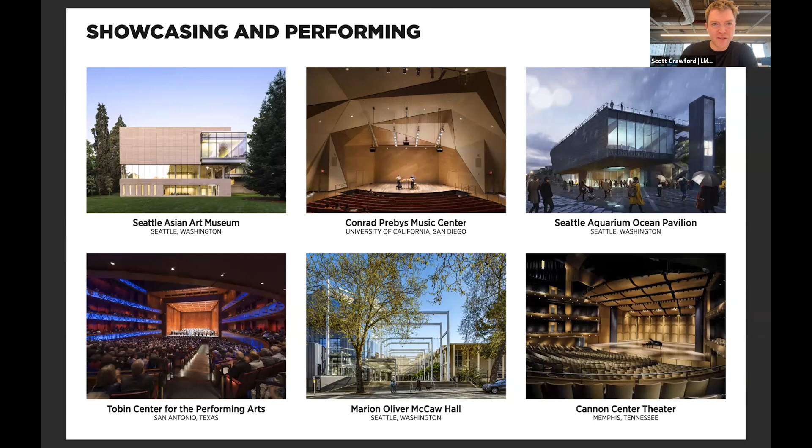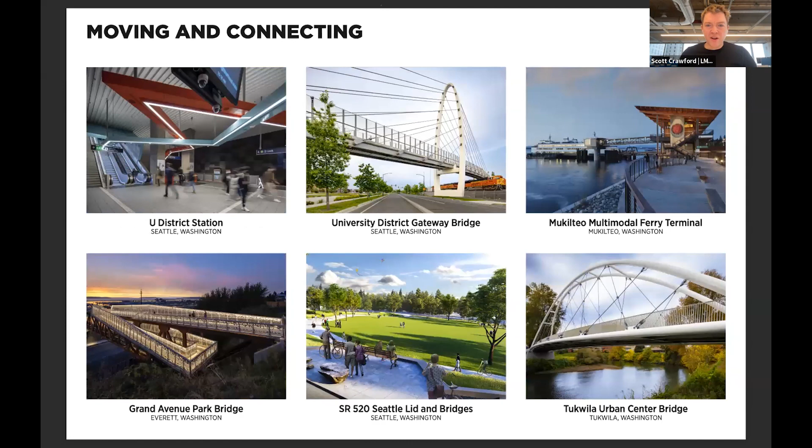Oftentimes with any of the projects we're working on, we're looking to accentuate the types of activities happening in those spaces, whether showcasing objects and art within museums, or creating performance spaces for people to enjoy the work of others, creating convention centers tightly knit into their urban fabric for gathering and exchanging of ideas, higher ed and K through 12 facilities that allow for the transfer of knowledge, workplaces that bring companies together throughout the Northwest as well as across the country, and infrastructure projects that create connections and move people back and forth.

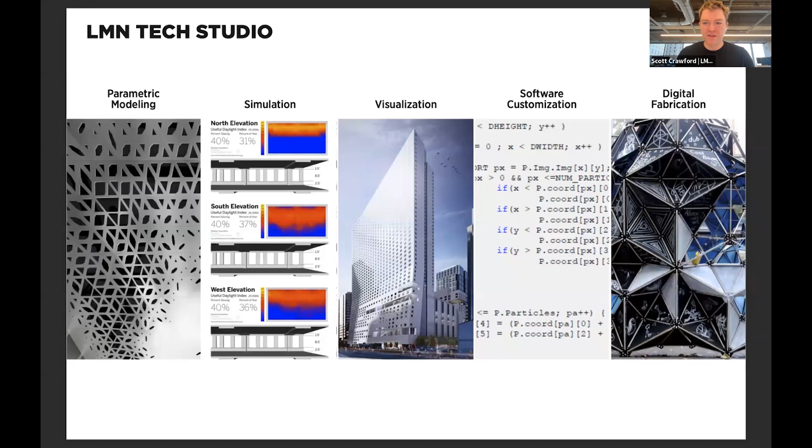So to supplement all of that collaborative environment that we get from the interactions we have with others, we also have our own desire constantly to learn about new things that we could be incorporating into our process. So in 2009, we founded a group within the office called LMN Tech Studio, looking at emerging technologies, both in the hardware and software side of things, and trying to find ways of embedding these new technologies into our workflow. Part of that initially happens on the fringe of the office, but then as things start to gain traction, we start to bring it to bear on our projects.

So here are examples of being able to use tools like digital fabrication to influence how we build models, mock-ups, and prototypes. We're always looking to take our 3D designs out of the computer and into physical reality, since in the end, that is ultimately what we're aiming to do.

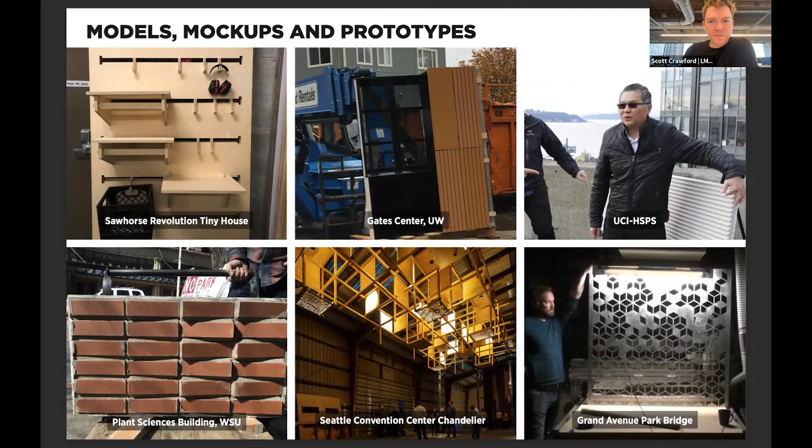And these types of experiments then come to influence the things that we further explore on our projects. By doing enough of those experiments, we get to put ourselves into places where we do things that are maybe a bit unexpected of an architecture firm, such as in this project that we did for the Seattle Symphony called Octave 9. We actually designed, fabricated, and delivered the entire ceiling system for this project, which has led us in new directions of trying to imagine what else could we maybe build on our projects.

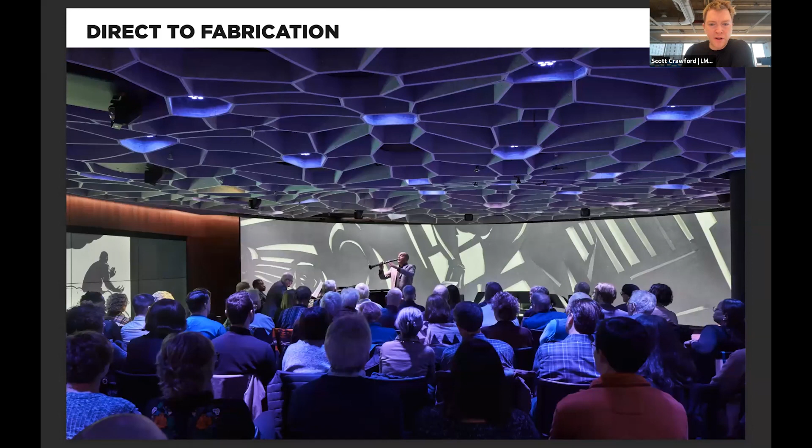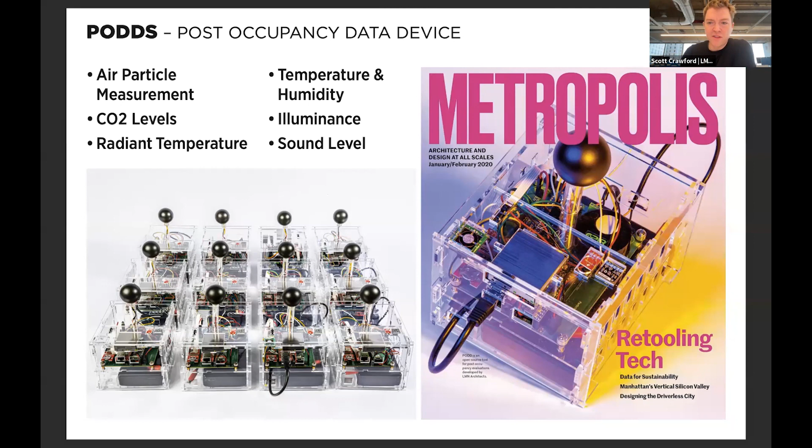We tinker and we build our own sensing devices so that we can better track post-occupancy data within spaces, and we then try to share that outwardly into the world. And we're constantly looking at the choices that we make on projects and the materials that we consider, and again being able to share those lessons that we learn with the outside world.

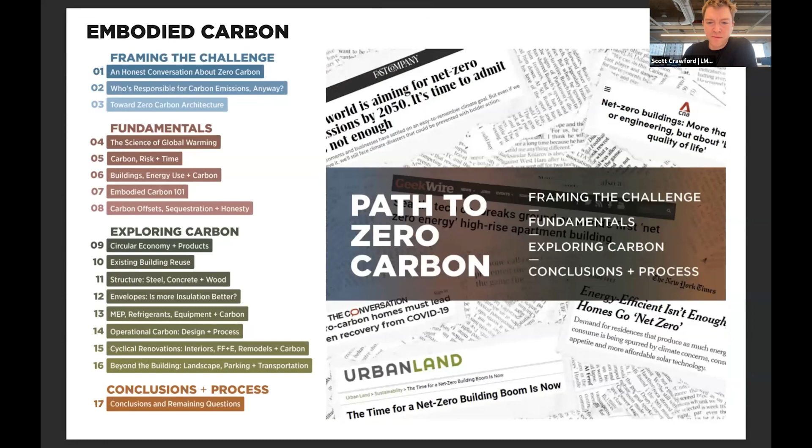And then Lauren mentioned our Path to Zero Carbon series that we've been working on, that tries to really get to the question of how are we going to solve this issue. And we're always trying to find a way of bringing these lessons that we learn back to our projects, to make sure that we're incorporating those lessons into bettering our work.

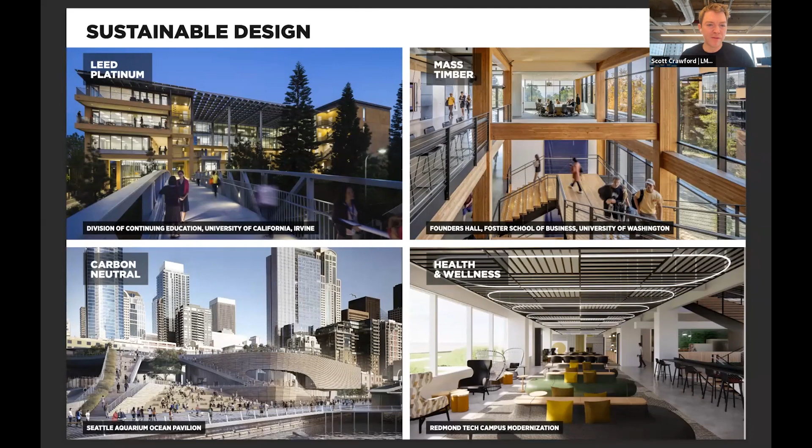And part of that sharing comes down to needing to constantly gather people, both internal to ourselves as well as external, together to exchange ideas. So that set us about recently looking around the neighborhood and peering into some empty storefronts to try to understand how could we take and bring a space up from our office, the activity happening there, out onto the streets.

And we recently have been completing the renovation of this bank space, where we're going to have now a 6,000 square foot shop space that'll also double as an event space that we can use to engage things like First Thursday art walks within the neighborhood.

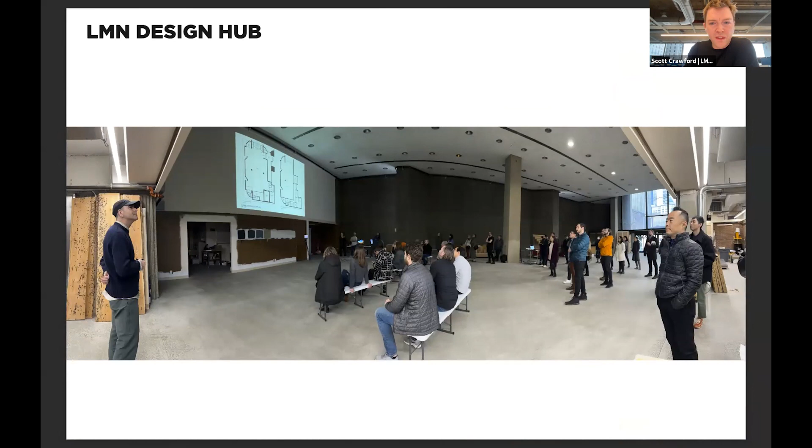So all of that's a little bit of a background in terms of the context of how we like to see the work that we do. And we're going to take and cover 4 projects today, all of various different types and various scales. And I'm going to start us off by moving into the Grand Avenue Park Bridge.

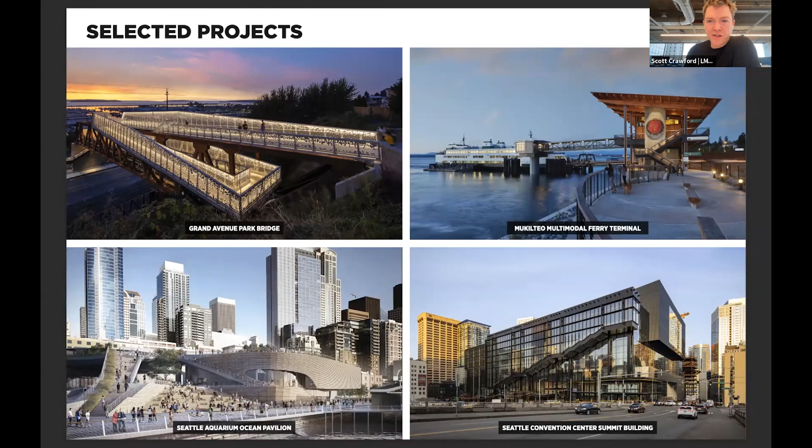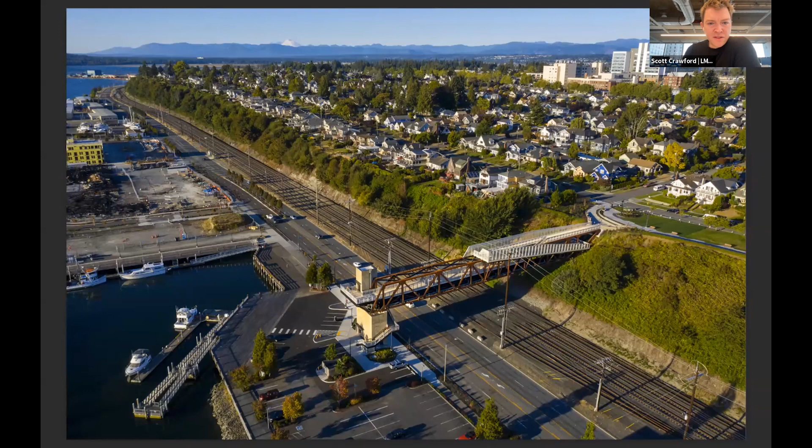So this is located about 40 minutes north of Seattle, right along the coast of the Puget Sound. So here you can see a little bit of the rest of that site. Pacific Northwest, if you've never been here, is quite a beautiful area with the mountains and water bodies all around, and very lush and green.

And one of the challenges on this project is we're trying to connect from a park in a historic neighborhood that is actually 75 feet above the surrounding area to the west, where we have a marina, a farmer's market, and a future waterfront development that's currently going on.

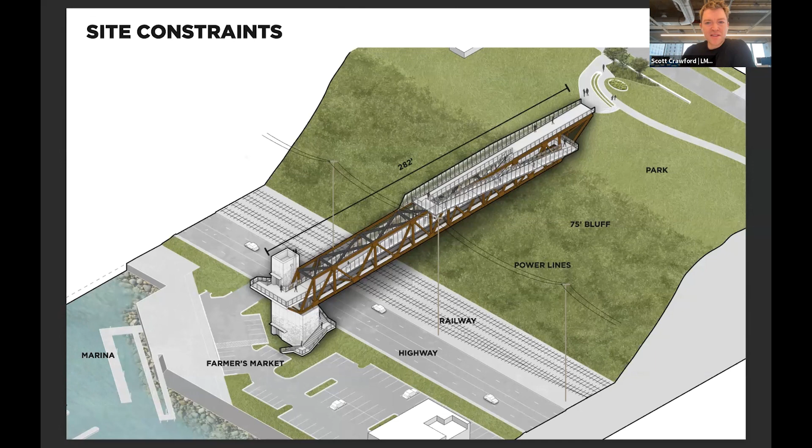They needed for this project to bring a set of utility pipes across, and so that was the primary requirement initially for the project, to get over the train tracks and the highway with those utility pipes. Now, in the Northwest, we have to deal with seismic activity.

So one of the challenges of this project was, given that 75-foot tall, unstable bluff, we really didn't want to have an elevator or stair embedded on that east side, the right side of the span. And also on the west side where the elevator tower is, we need to limit the height of that tower so that we can ensure that we're not adversely affected by the seismic activity.

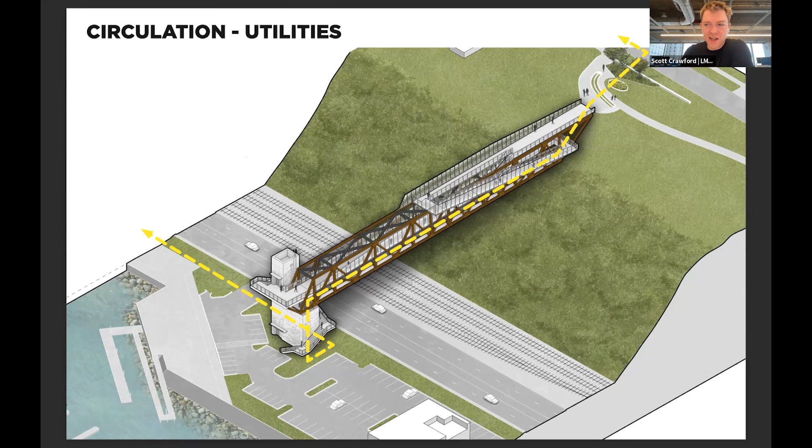So that led us to a unique configuration for this truss, where instead of walking into the middle of the truss like you would on most bridges, you actually start by walking out on the top of it. And this was something that, by working closely with the engineers, we came up with a solution that we could take and tip the entire truss to limit the height of the elevator tower on the west.

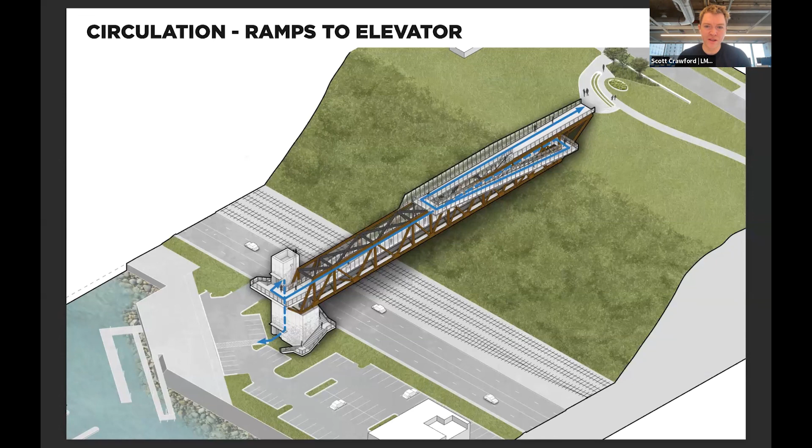And in the process, create this really dynamic experience where if you're traveling on wheels, either wheelchair, bicycle, or stroller, you have the ability to always stay on a sloped walkway to gradually bring you down to the elevator on the other side. And then if you're able to, you can go right down the middle and cut through a stair that then brings you to the stair at the west end that wraps around the entire thing.

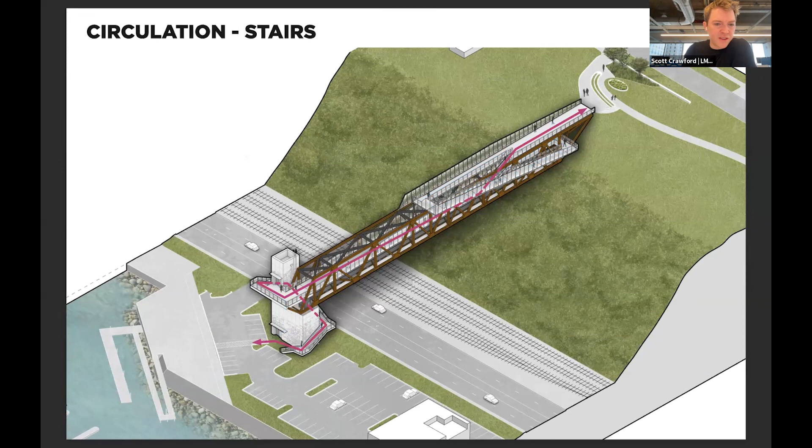A requirement on a project like this is always having guardrails, but in cases when we're over top of the train tracks, we need to expand the height to 10 feet to have a throw barrier. So we're looking at elements like this trying to think how can we bring a more human scale to this, and a texture that contrasts with the infrastructure scale of that overall truss, something a little more delicate, and bringing some of that patterning onto the elevator tower on the west side.

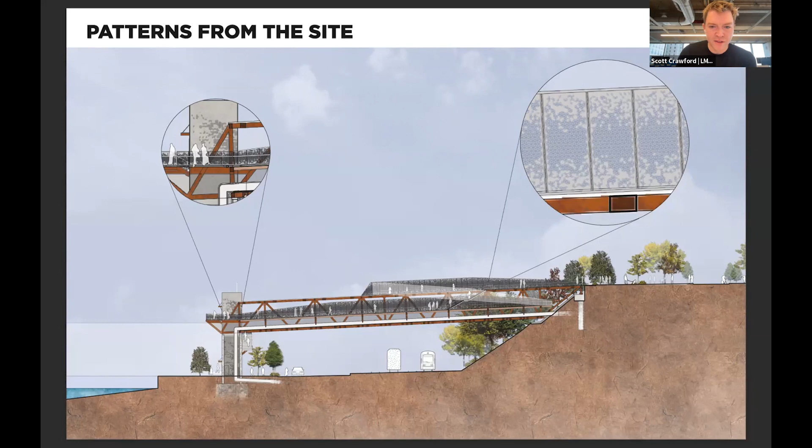Starting with this idea, we're generating parametric models that allow us to track every single one of those panels. We're also considering how the pattern would be fabricated, what tools would be used, and how we can use differentiation within that pattern to give us performance effects—in this case, having more solid areas closer to the lights to reflect light down onto the deck, and in areas where we want views out, opening that pattern up.

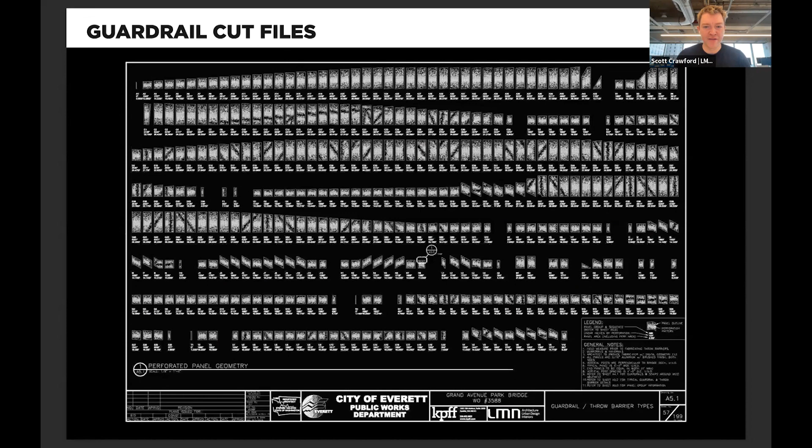One of the things we've had a lot of success with, and really enjoy, is being able to provide a level of documentation for these custom elements that allows us to give a fabricator enough information that they can easily go about making these pieces.

That's more than just drawing the pattern—it's labeling every panel so they know all the different parts we're tracking, giving them metrics like the lineal inches of cut required, or the surface area of every panel. In this situation, we even provided cut files laid out for the CNC machine, coordinated with the actual fabricator, so we could go direct to fabrication with our geometry and not have to worry about a shop drawing process.

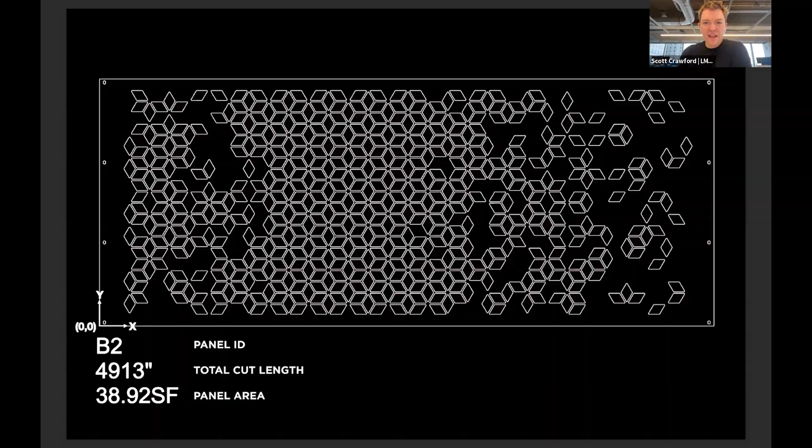At the completely other end of the scale for this project, there's the excitement of a bridge project—being able to see these things come together in a way buildings don't always have the opportunity for, constructing this over 280-foot long object along the side of the highway that then gets lifted up. Over the course of 8 hours, a transporter slowly moved it into place, parked it, and dropped it onto its foundations.

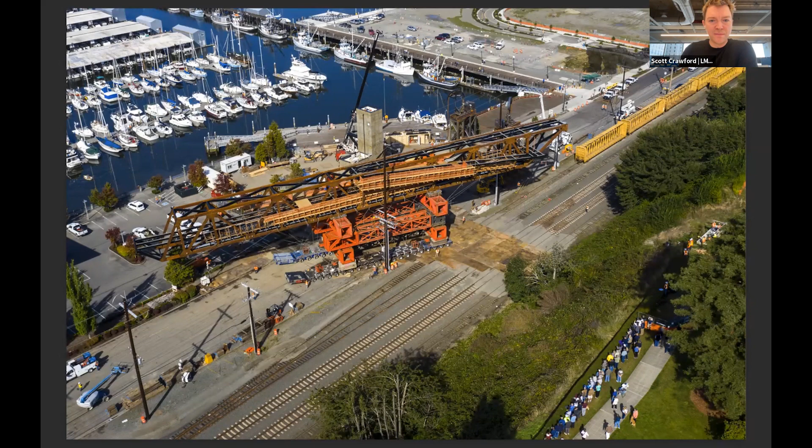What's really great about this, in addition to the engineering feat, is watching the whole community come out for this event and seeing the excitement around the delivery of the bridge. So here are some shots of it finishing up.

We paid a lot of attention during the design to the materials being used, ensuring minimum maintenance over the highway and railroad tracks—using weathering steel as well as bare aluminum for the throw barrier panels, incorporating details that give more of a human scale, a delicate touch, and something of intrigue where people directly interact with the structure.

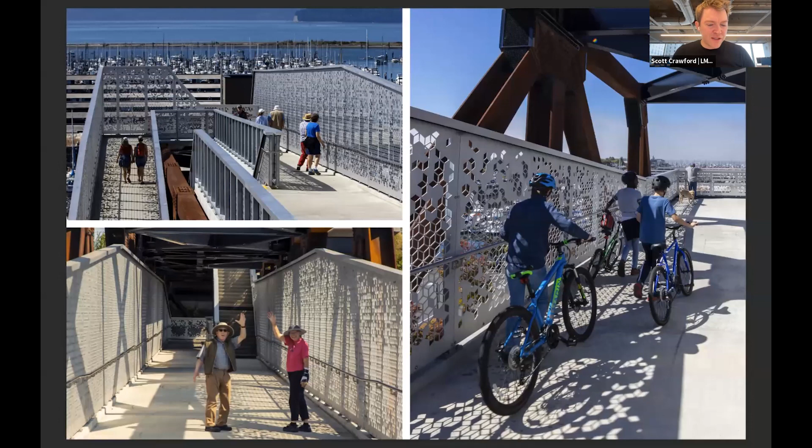What's been great for us in seeing this open, and why we love doing this type of work, is the excitement the community has about it, and seeing how well loved it already is as a structure—people aren't just connecting from the park side to the waterfront side, it's become almost like a playground, with kids going back and forth on scooters, bicycles, and skateboards, really using it as something to interact with more than just cross.

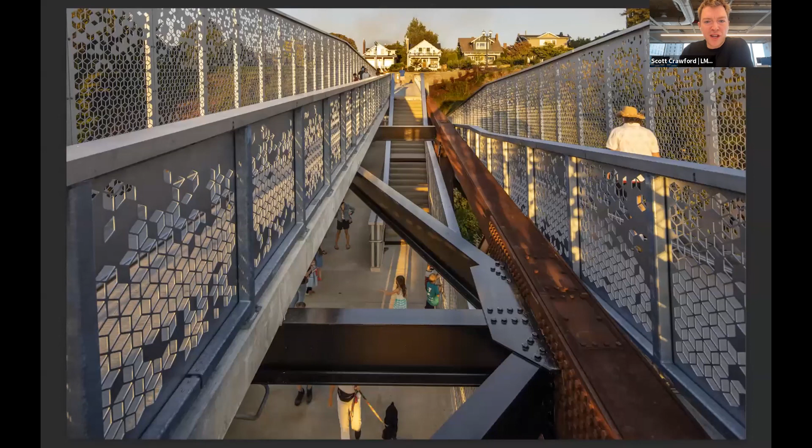Just a few more shots of moving through that. I think the richness for us, being in the Northwest, is that it's something we can always go out and visit, a great spot to enjoy views of the Pacific Northwest.

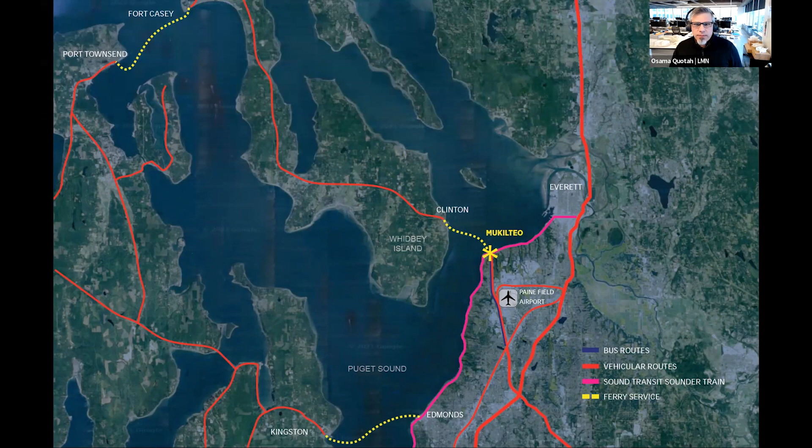The new terminal is located on the land where the 1855 Treaty of Point Elliott occurred. That was a treaty signed by the local Coast Salish tribes, ceding millions of acres of land that they lived on to the US government, but guaranteeing perpetual hunting and fishing rights to the tribes on these ancestral lands.

But during World War II, the site became an auxiliary fueling facility due to its proximity to the newly built Snohomish County Airport. After decommissioning the site in the 1990s, it was clear that reconciliation was needed, both environmentally and culturally, to restore the site as an important place as we started planning the new ferry terminal.

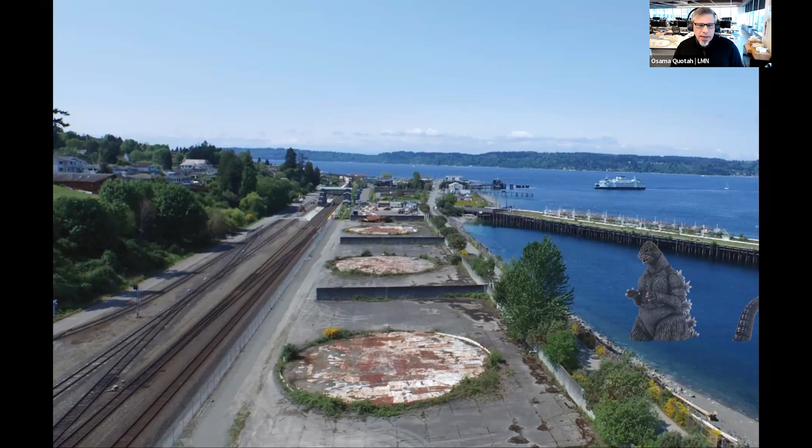So the project team worked with the Coast Salish Tribes, visiting the tribes on their land with drawings and physical models, listening and incorporating their history and environmental stewardship into the concepts for the project.

What resulted is this two-story terminal, a contemporary spin on a traditional Northwest longhouse, the type of building traditionally used by the Coast Salish community for gathering and ceremonies, but using materials such as steel, glass, and heavy timber—a nod to the fusion of the past and the present, the traditional and the contemporary.

Environmental stewardship was really important to us in the design, and the project includes careful site planning, careful stormwater management, passive air systems, minimal energy consumption, and an all-electric mechanical system. We have the goal of the project being net zero carbon by 2030. All of this was inspired by the native guiding principle to live light on the earth.

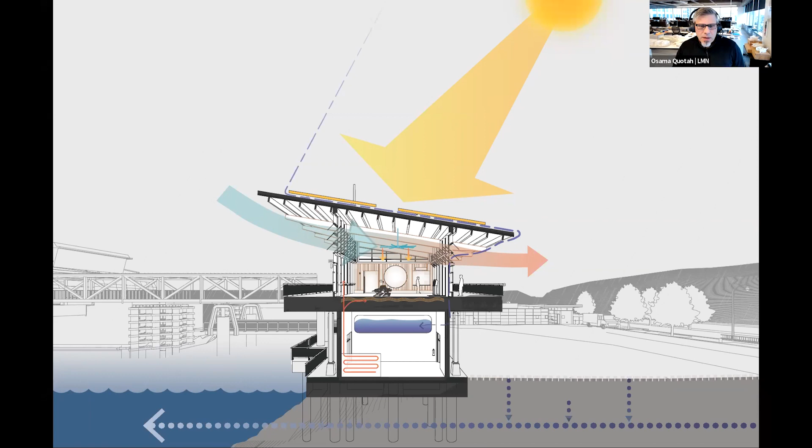The large south-facing shed roof supports about 408 PV panels, which supply 40% of the terminal's electric demand. We incorporated daylighting and views, essential as you look out to the Salish Sea.

Operable windows are used to naturally ventilate and passively cool the project. We used computational fluid dynamic modeling to inform the sizing of the rack and pinion window system, which automatically opens and closes in response to changing temperatures, optimizing airflow for the passengers and providing thermal comfort within the facility.

The project utilizes FSC certified wood, mass timber, and CLT panels, which help to reduce the project's embodied carbon. But cedar is also a very important material for the tribes in the region, for the Coast Salish tribes, and is used throughout their cultural work.

In addition to using the wood, we also worked very closely with a number of Native American artists who incorporated their cultural works throughout the project, representing the region's rich tribal heritage and creating this atmosphere of welcoming and belonging.

The cedar toll booths receive over 4 million ferry passengers annually, and they have adorned on them a pair of 16-foot tall Coast Salish welcome figures by a Squamish artist that greet everybody who enters this territory in the traditional way, hands outstretched and palms facing the sky in respect and honor.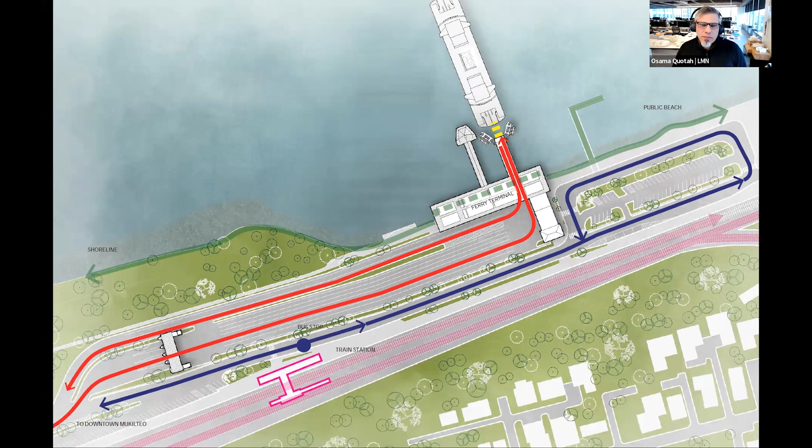In addition to cars, the terminal is an integral link in a chain of regional train, bus, pedestrian, and bicycle networks, with a new waterfront promenade connecting from downtown Mukilteo through the terminal and onto the beach, creating an elevated pathway for public use, encouraging connectivity in and out through the community, with the knowledge that walk-on and bike-on ridership is set to double in the next 20 years.

We really see this project as a piece of urban and civic infrastructure, and a model for how local, state, and tribal governments can work together, representing what's possible when the community and the design team collaborate to support a shared vision—a contemporary expression that captures the deep cultural legacy of the place.

I wanted to jump from this to another project that we have, again, on the water's edge, along the Salish Sea, and it's the Seattle Aquarium. We're working now on an addition for the Seattle Aquarium that's called the Ocean Pavilion.

The Seattle Aquarium is a conservation organization that's been rethinking how to amplify their impact beyond the walls of their institution. As they think about this, they've been thinking about it in the broadest terms, what it means for our planet, what it means for our communities, and how they can affect change.

As we approach the site, we have this barrier between the existing Seattle Aquarium and the city. In the 1950s, Seattle's connection to the waterfront was severed by a double-decker highway. So the city decided to remove the viaduct and replace it with a public promenade along the water's edge, designed by James Corner Field Operations, with the aquarium expansion at the most important intersection along the waterfront, connecting Pike Place Market, an important cultural heritage site, out to the Salish Sea, and traversing the steep topography we have in our city.

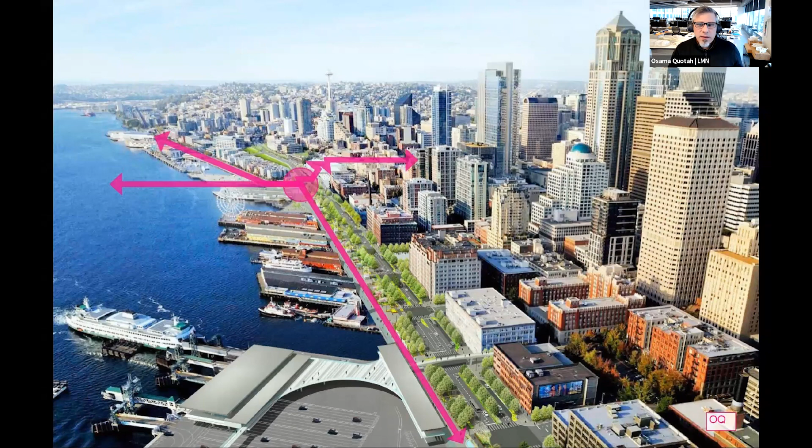By putting the Ocean Pavilion in this location, it's really a statement of values by the community in Seattle, to make a place of conservation central to the waterfront experience, and a place to heal the relationship between the land and the water and the cultural history of our city.

Like on the Mukilteo project, there was an early acknowledgement that through this work, we had to change the dynamic around engagement. We needed an inclusive process that acknowledged the cultural history of the land and the importance of this place for the local tribes.

The design process started with early collaboration, early consultation and engagement that included visiting the tribes on their land. We brought on a team of tribal consultants who became part of our team and participated in design conversations, and we workshopped with tribal youth and tribal elders to understand how they saw themselves in this project.

Now that the viaduct is gone, and the ocean and the promenade and the Ocean Pavilion are under construction, this is the vision for where we're going. The mass of the building is located where the double-decker highway used to be, but the building is shifted to the south to create a public amphitheater where the piers pull apart, providing an unobstructed view out to the water.

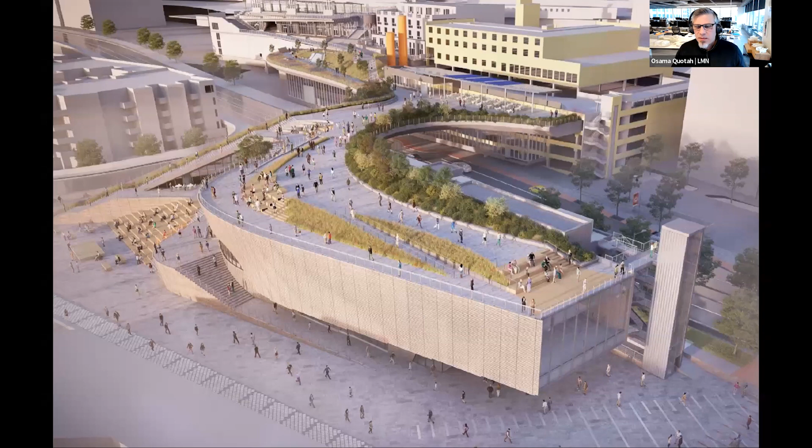The roof of the Ocean Pavilion provides a mix of plants, plazas, and seating areas with views back out to the water, to our working waterfront, and to the large landscape of mountains and the Salish Sea, creating an amazing civic experience on all faces of the project, and connecting back to the Field Operations Overlook Walk project, which provides a seamless pedestrian experience from the waterfront back to the city.

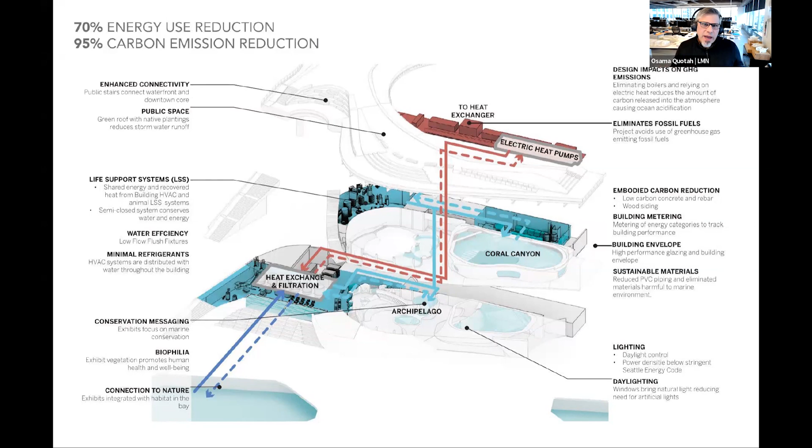Sustainability and our relationship to the ocean was an integral part of the project. Sustainable strategies were tied to the mission of the institution, focusing on the health of the Salish Sea, plastics and materials, climate change, resilience. We continue to study aggressive targets around energy and carbon reduction, and are working with the aquarium to identify sustainable strategies at the larger campus scale that they can incorporate.

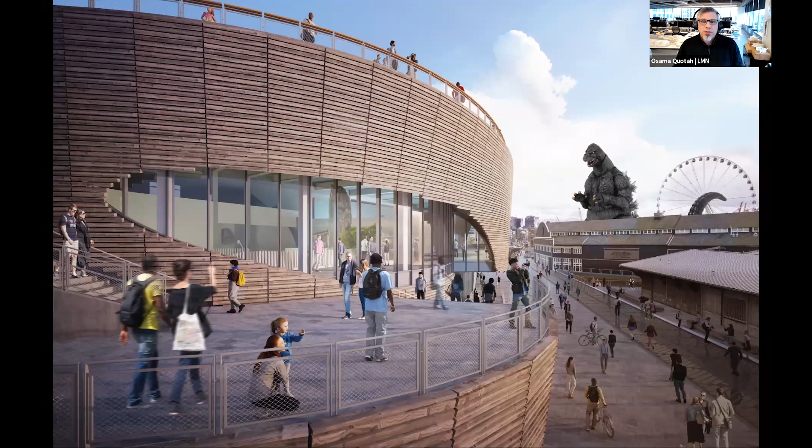As you move to the exterior, this side of the Ocean Pavilion that faces out west towards the ocean was meant to capture the large natural landscapes and the character of the Pacific Northwest coast. The siding is composed of cedar timbers, an important material for the tribes, and we source them from sustainably harvested wood from tribally managed forests as a means to also provide economic benefit to the tribes we were working with.

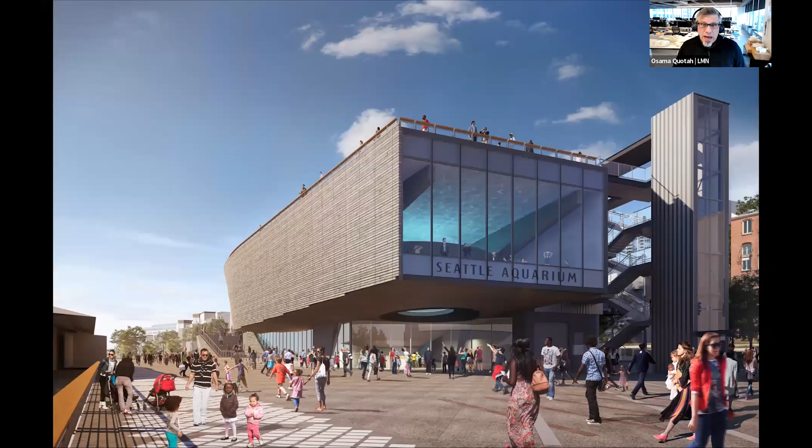The wood cladding at this knuckle pulls away and provides views from the aquarium out to the water and glimpses back into the aquarium and the exhibits inside, providing a civic moment where everyone is invited to participate and engage in the experience. As you approach the building from the south, you also get this wonderful cross-section where the activity of the promenade, the activity on the roof, and the life of the facility all come together in this unifying civic space.

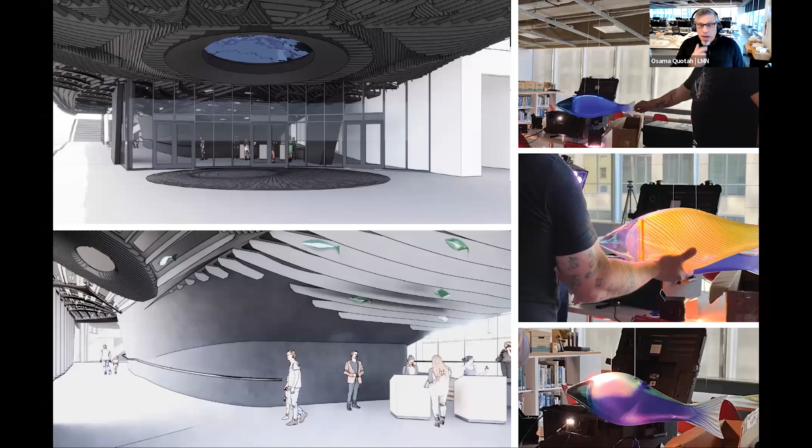And we've been working with a Coast Salish Lummi artist named Dan Friday, whose public artwork will engulf the building entry. These are pictures of Dan in our office as we've been working with him on lighting, constructability, developing mock-ups, and really figuring out how to incorporate the artwork in with the architecture in a meaningful way.

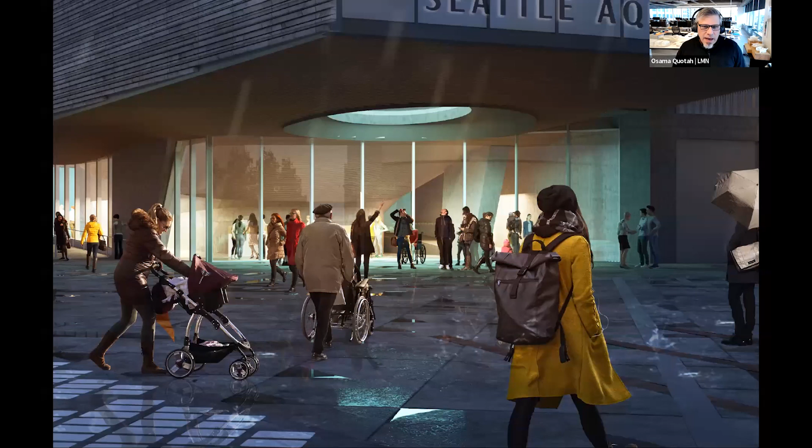The goal is to have the artwork integrated into the soffit at the front entry of the building, as a welcoming element with themes that recognize tribal sovereignty and fishing rights in the Pacific Northwest. At the bottom of that entry soffit, among Dan's artwork, will be an oculus that provides public views into our largest exhibit, the Coral Canyon, or the Reef, which is another moment where everyone can participate in the cultural stories.

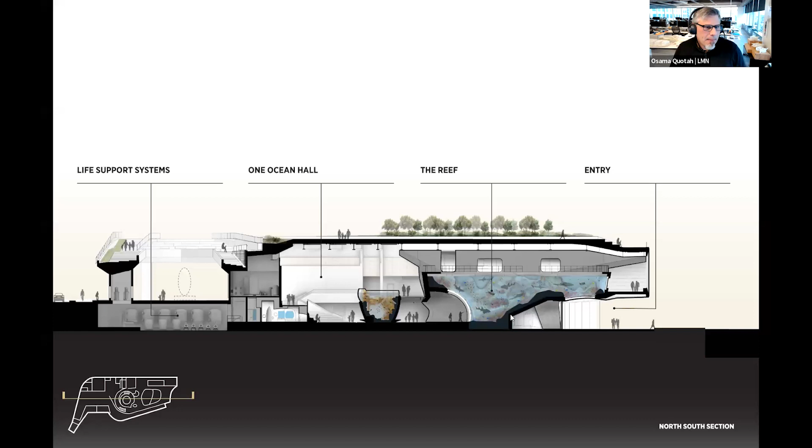So looking at a section of the building, here's that oculus window Osama was just showing us. Guests enter the building through the lobby and circulate up through a series of ramps to our main gallery, which is highly interactive and full of a lot of multimedia content.

Guests ascend up the spiral stair and arrive at our largest habitat, which is a structural feat of engineering. It holds 350,000 gallons, and just based off the hydrostatic pressure alone of the water, increased our concrete walls up to 24 inches thick. At which point our structural engineer told us we were basically holding up the roof for free and we gained a shear wall.

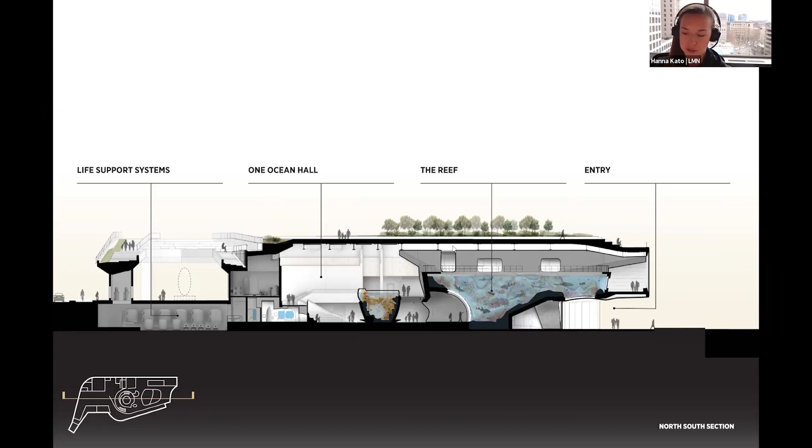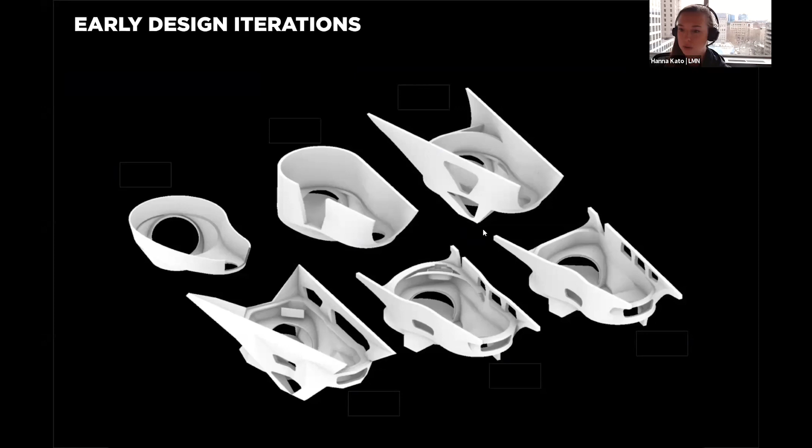So the design of our tank, we designed parametrically using a series of digital models, which were absolutely essential in collaboration with consultants, but also contractors and directly with manufacturers.

The exhibit features elasmobranchs from the Indo-Pacific Ocean, so that's animals like stingrays, guitarfish, small reef sharks. The rockwork is used to replicate the animal's native habitat, but also to conceal window views from each other and to conceal our LSS piping, which is essentially HVAC for fish.

So we have a series of supply piping that we've actually directed at windows to help keep the windows clean, a series of vacuum ports that divers can actually connect into to clean the tank, and then a series of skimmers and sumps that return the water back to the LSS equipment, like fractionators and degas towers.

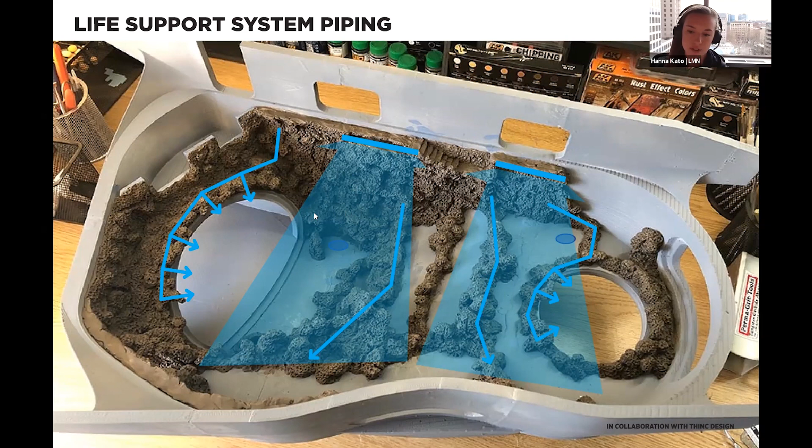We had a lot of really fun animal requirements to work with on this project. For example, a 45-foot diameter is the comfortable swimming radius of a shark, who tend to stay at the surface of the water. Stingrays, they like to lay and rest in different sand beds, so we had to have a specific ratio of animals to sand beds, and we had to work with the aquarium on their animal count for the exhibit.

And then once stingrays lay in the sand, it sticks to their bellies, so they become these little sandpaper discs. So to keep them from scuffing up the oculus window over time, we actually added a big arc to it to discourage animals from laying on it and scuffing it up.

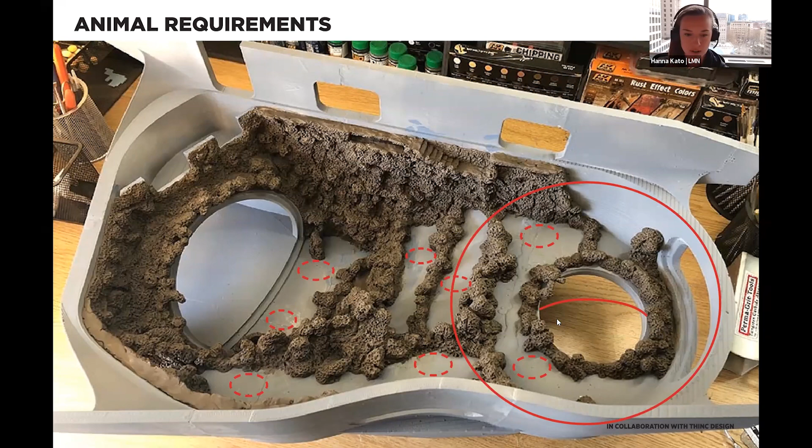During design, we did a series of lighting mock-ups to really understand the reflections and refractions that happen in the water. We used that information to help us lay out our lighting and make sure the rockwork was adequately lit for the animals. Rockwork, however, is really heavy, so we took that clay model and we scanned it.

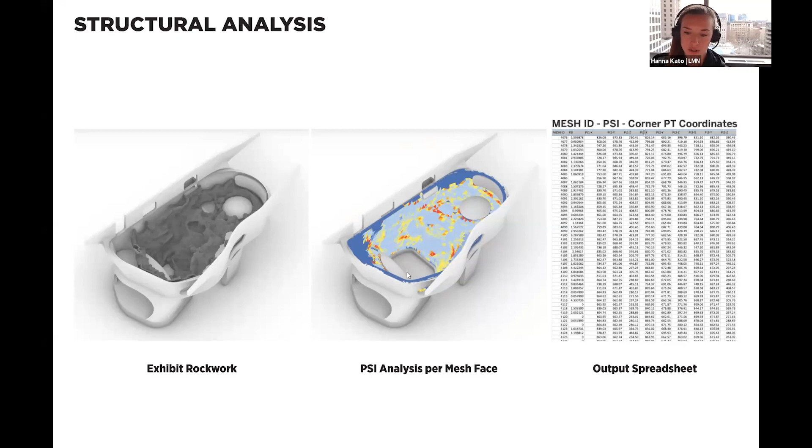We brought it back into our digital models and ran a full structural analysis to confirm that our concrete could handle the additional load. At the end of design, we rationalized the final form and introduced as many flat planes as possible, singularly curved planes, so that we could really control costs and help constructability.

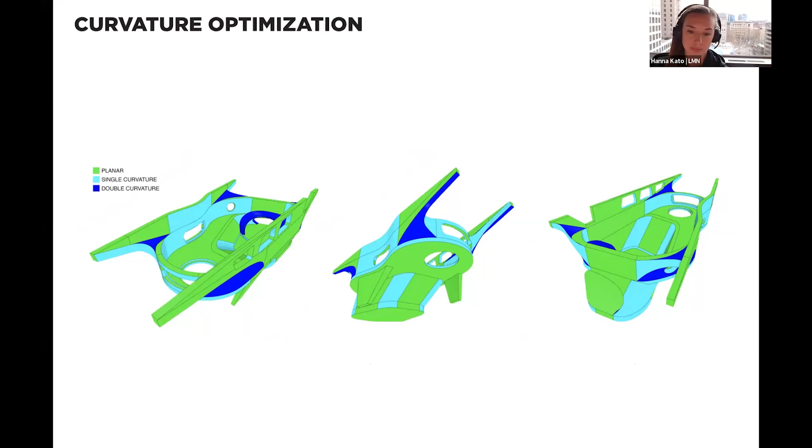We also used these planes to determine the rebar orientation, and once we got into construction, the contractors modeled every single piece of rebar, every layer, every splice, every lap, every transition, because we had to.

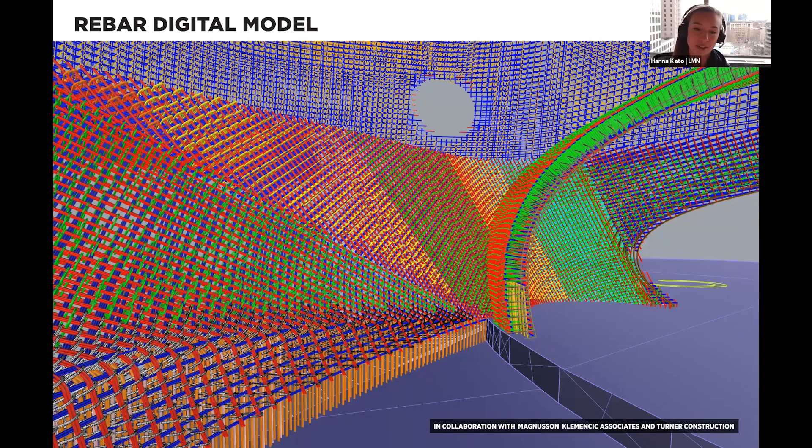We had weekly meetings for months with the contractors, the concrete subs, the rebar subs, the structural engineers, everybody's detailers, everybody's modelers, to work through and figure out every clash and every transition, which was highly successful. We had a couple of field modifications, but the end result was about 1 million pounds of rebar, which is about equivalent to a 60-story shear wall.

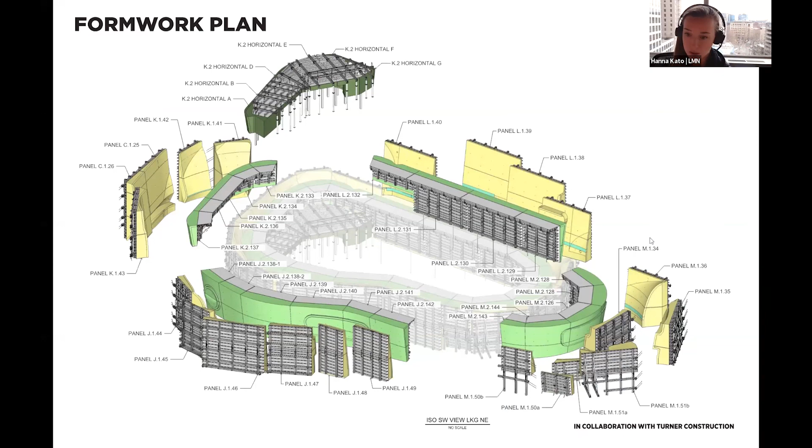For the actual form of the tank, we handed our digital models directly to the contractor and the manufacturer. They worked with Janicki, who's an aerospace manufacturer, and they actually CNC'd foam to create the form for the inside and the outside surface of the walls, which came in 250 panels that the contractor assembled on site.

We didn't want any cold joints in the water level, so the contractor poured the entire tank in one single pour, which, because of our unique geometry, meant that lower bowl they were pouring completely blind. It took them about 21 hours. This is where we are today. They're starting to strip off the forms and reveal the concrete underneath.

Yeah, so I'm now going to talk a little bit about the Seattle Convention Center Summit Building, which is a project. Wait a sec. Yeah, no, I'm not muted. Which is a project that opened last week here in Seattle.

Starting with where the project is, this is Seattle with the site for the convention center expansion highlighted here with the red pen. The expansion site sits in a really interesting intersection of neighborhoods in the core of Seattle. It's just a block away from the existing convention center, walking distance to hotels, restaurants, bars. When people come to visit Seattle, this is where they want to be. Also very close to the waterfront and Pike Place Market.

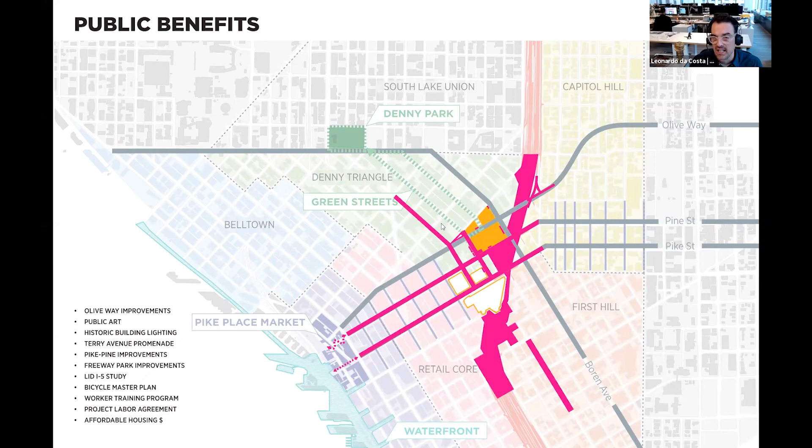I like to share this diagram because it shows a graphic representation of the public benefits package for this project. One way of talking about this project is just focusing on the physical perimeter of the building and saying this is the footprint. But the way we like to talk about this project is a little bit different. We like to talk about this as the real footprint of the building, which shows the impact of this project in our community.

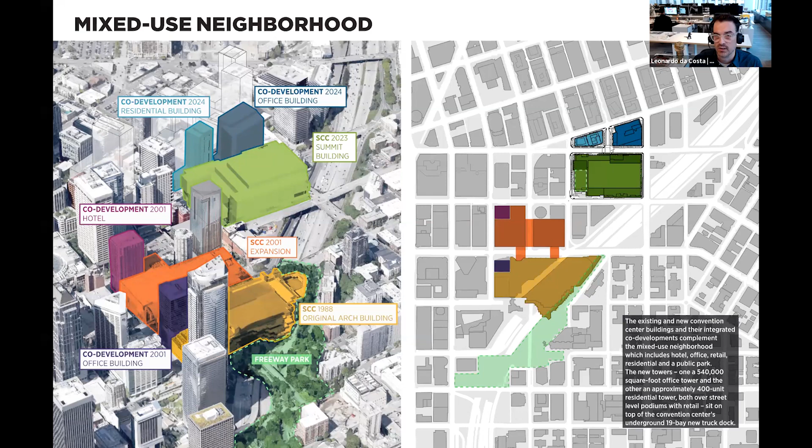This is a mixed-use project. We designed the convention center, but we also designed two co-development towers. There's a residential tower and an office tower, and the two sit on top of the convention center's below-grade loading dock over here. The office tower is actually under construction right now.

One of the main interesting and unique points of this convention center is how the program is actually stacked. This is very unique for how convention centers work. At the bottom, you see the exhibit hall sitting below grade. This is a long span room, 150,000 square feet. Above that, we have the lobby, the main lobby with the market.

I'll talk a little more about this later in the presentation. Above the ground level with the lobby and market, we have another exhibition hall, 100,000 square feet, another long span room. Then we have two meeting room levels, and completing the stack, another long span room, which is a ballroom, 58,000 square feet. What makes that stack unique is the stacking of long span over long span over long span room.

From the beginning of the project, because we're building in a downtown area where available land is more limited, we didn't have enough real estate for one contiguous exhibit hall space for the 250,000 square feet on one level. So we knew from the beginning we had to split the program into two different levels. The way we dealt with that was to create a series of floor openings between the two, creating this atrium space that connects through the whole height of the building and ends on a skylight.

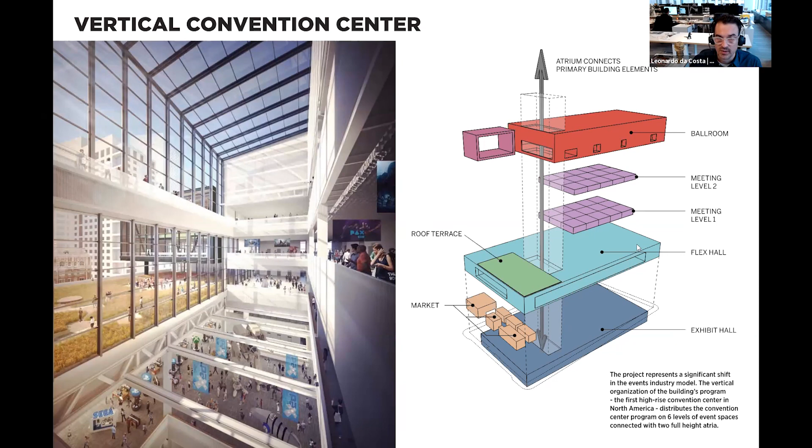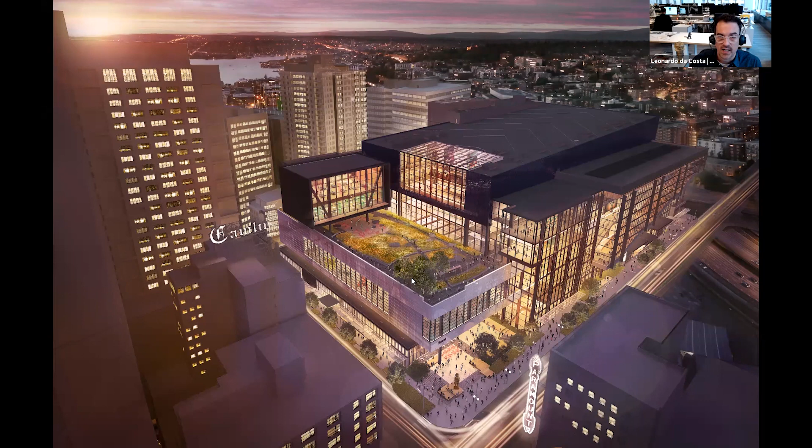We have the two levels of meeting rooms and the ballroom on top. And here you see the outdoor event terrace for this project, which we think is very cool because on two sides of this space you're framed by the building itself, and on the other two sides you're framed by the city skyline. You can also see the tops of two historic buildings that also frame that space.

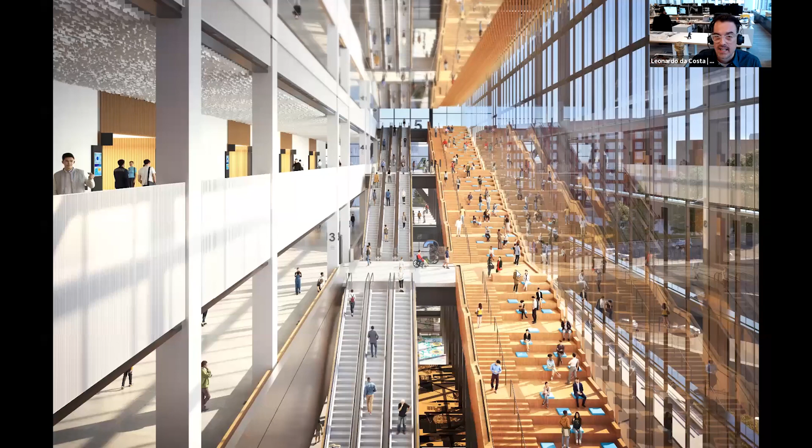The space you see here we call the hill climb. This is on the south facade of the building. This portion of the facade actually cantilevers over the sidewalk. Inside the hill climb is basically one of the two main circulation spines in this building. You can see a set of escalators and a set of stairs. This area is the part that cantilevers over the sidewalk, with tiered seating along this south-facing window.

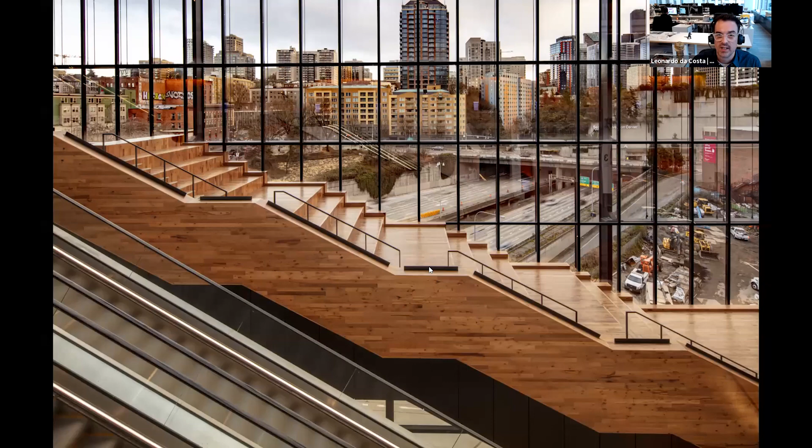This is a view of that space looking south. Because of the amount of glazing that we have here, you can see how the skyline of the city starts becoming a big part of how you actually experience this building.

This is still on the hill climb, now looking west. This is that south wall, and this is that tiered seating area that cantilevers over the sidewalk. Because it's over the sidewalk, we were able to have this west-facing window with unobstructed views all the way to the Salish Sea. You can actually see the Pike Place Market sign from there as well.

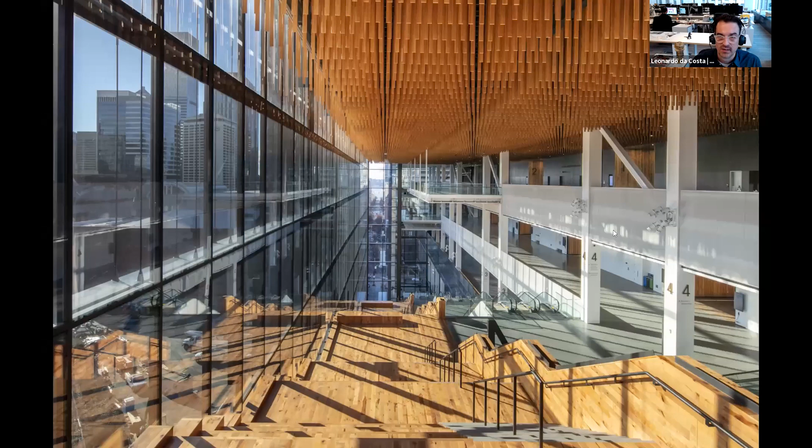This is a picture, after construction, of that same space.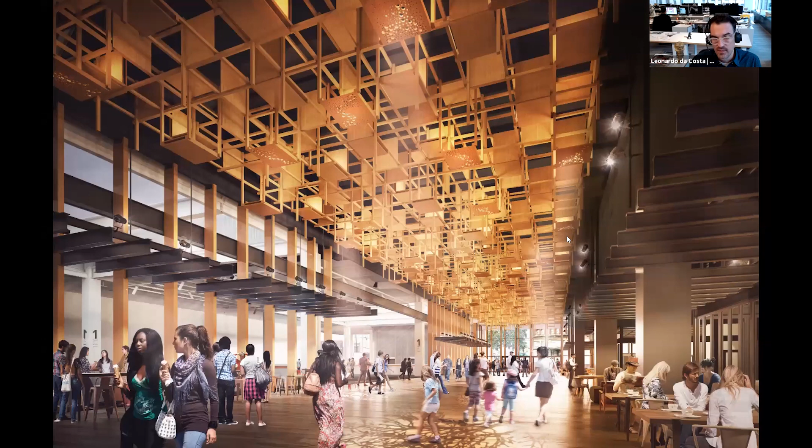Once you get inside the lobby, this is what we call the mixing zone—the more public side of the convention center lobby, with retail to the side here, and the registration hall for the convention center to the left. And this is a good segue for Vanessa.

As you saw in Leo's pictures, wood is a very prominent part of all these spaces. This is because the design team really wanted to connect the visitors coming to the conventions back to their immediate surroundings. And what better way to do it than with wood, given the long and rich history in Seattle of the lumber industry.

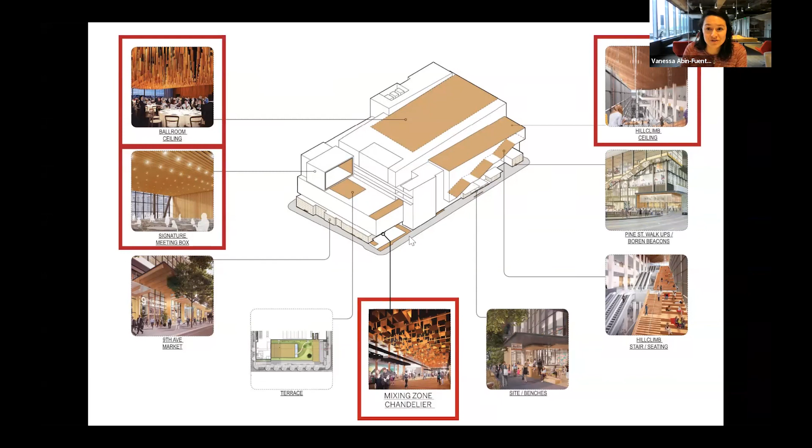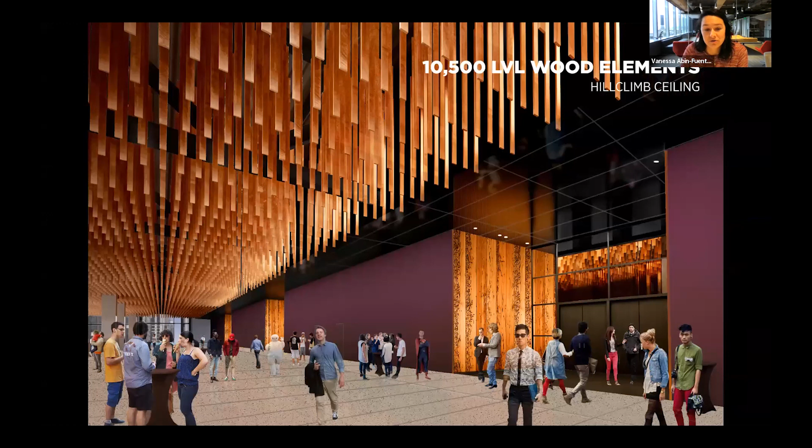Early on, we understood that models and full-scale mock-ups were going to be a crucial part of our design process—really trying to understand the complexity of these systems and how somebody might assemble them, and understanding the materiality constraints. As Leo mentioned, the ballroom ceiling has thousands of salvaged warm wood boards coming from decommissioned log booms, so we really wanted to engage with the material with our hands. Also, lighting became so critical—how do you start lighting pieces of wood to really accentuate their warmth and texture—while also leveraging our shop capabilities and fabrication mindset that we had been building up along the way.

I want to use the chandelier as an example to dive deeper into this design process. As Leo mentioned, this is the main entrance for the entire building—a 180-foot-long chandelier that hovers above the entrance. We like to say it's the biggest chandelier in the world; the debate's still out. But it really gives visitors a glimpse of the amazing spaces they will find along the way.

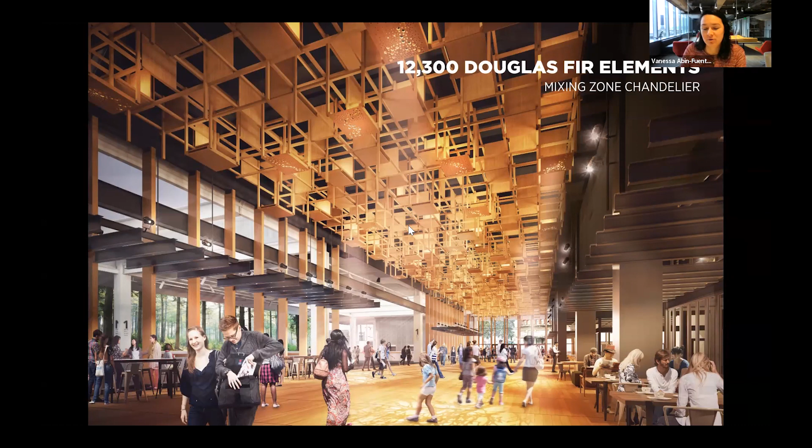So we started here in-house in our office with scaled models. This little guy was crucial in how we started to understand the sequencing of the assembly and how to compartmentalize it in simple ways so we could engage in conversations with the fabricator.

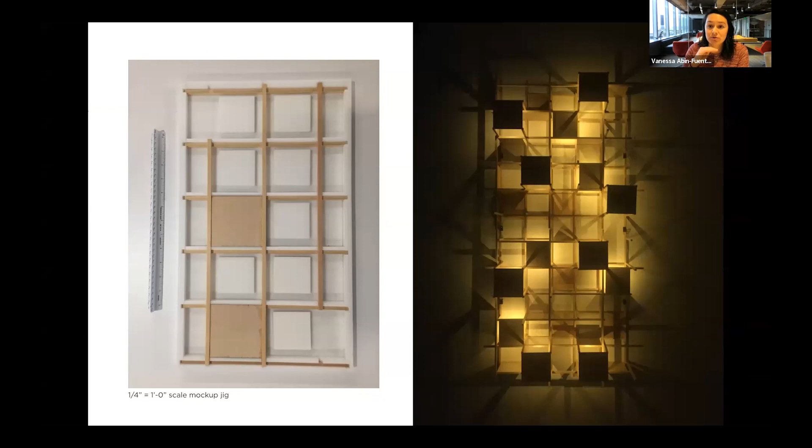We learned that the best way to assemble it would be to create it in planes. Using this jig made the process a lot more streamlined, where we could lay sticks down, start screwing them, repeat the process over and over, and then thread sticks perpendicular to these planes to create the three-dimensionality of the piece.

With the scale mock-up or model, we also started to explore lighting, but we quickly learned that we were limited by the size of the light source.

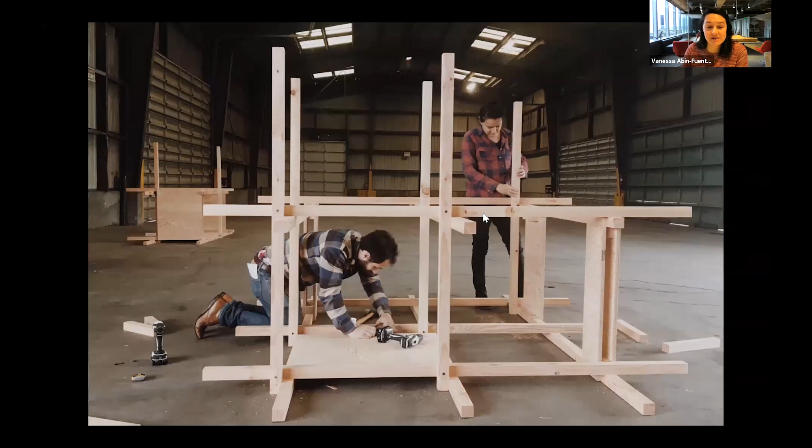So we scaled up. We worked with the client and the contractor and acquired a warehouse down in Sodo, south of downtown Seattle, where we built four of these systems in full-scale mock-ups.

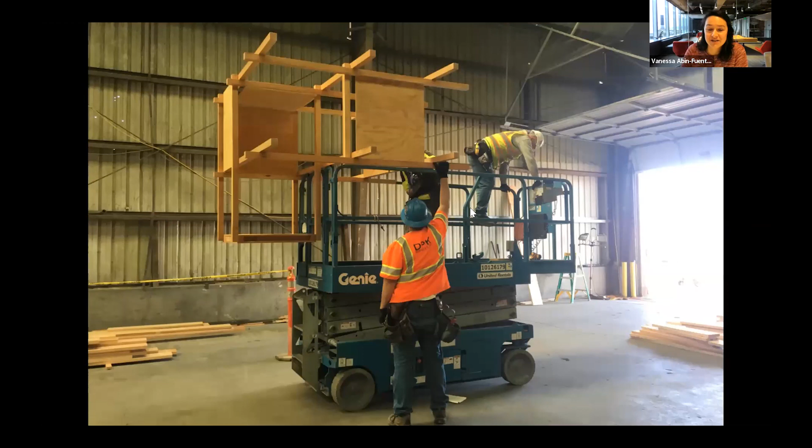This was such a valuable learning experience. Once you have conversations with the contractor, you really get to engage with things you don't usually engage with when just looking at a 3D model, like the sizing limitations of scissor lifts, or how much weight a person can hold above their heads while screwing something into a unistrut.

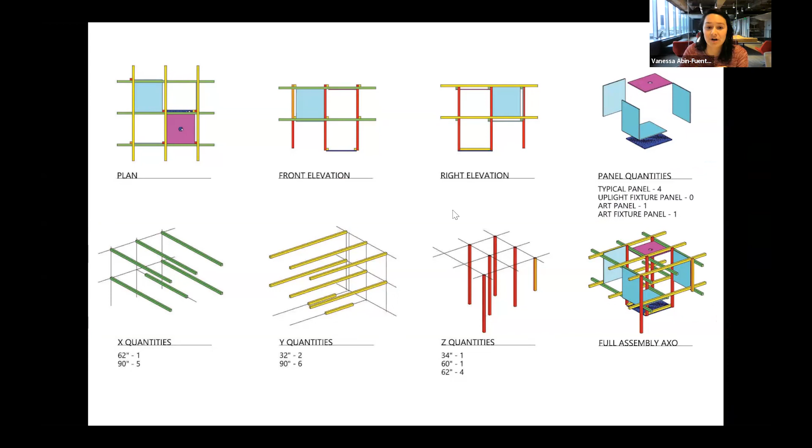All of these discoveries and conversations really inspired and influenced how we started to structure our 3D model, and ultimately how we documented the entire system to give it to the contractor.

We also upscaled our lighting explorations. We invited HLB, our lighting consultants, to the warehouse, and had many late nights playing with the light, getting excited about discoveries using different intensity and directionality, iterating in real time, getting feedback and iterating again with them. It really created a streamlined conversation and fostered a very fruitful partnership with them.

This also started to get incorporated into the art program that happens throughout the building. We worked with Cathy McLure, a local Seattle artist, who was really motivated to expand the wood story we had been crafting for this building. She was inspired by the microscopic cell structure of Pacific Northwest trees.

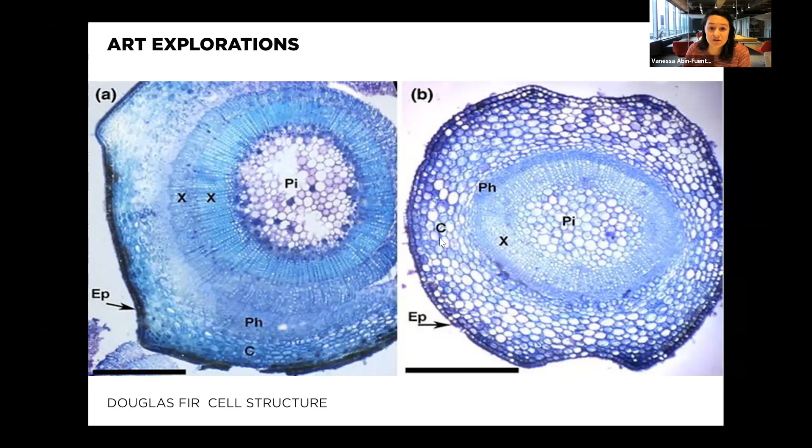For example, here you see the Douglas fir cell structure, and that directly influenced how she designed these perforated panels. The idea is that these panels would be at the bottom of the chandelier, light would be shone onto them, and the projected image would be cast onto the ground floor, trying to mimic the dappled light effect you might find hiking through a Pacific Northwest forest.

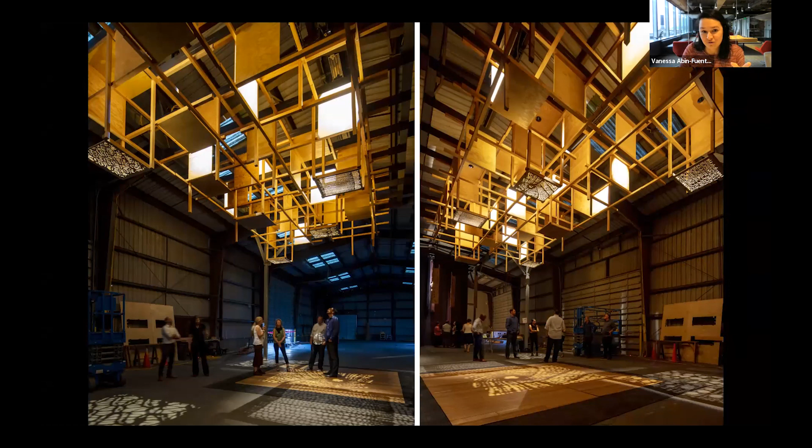So here's an image of the mock-up in its final form. This became such a useful tool. Luckily, we were able to have it up for almost a year.

We would bring the client, the contractor, and the artist to have conversations in real time looking at that detail, asking how we could expand it. This just became a very useful tool.

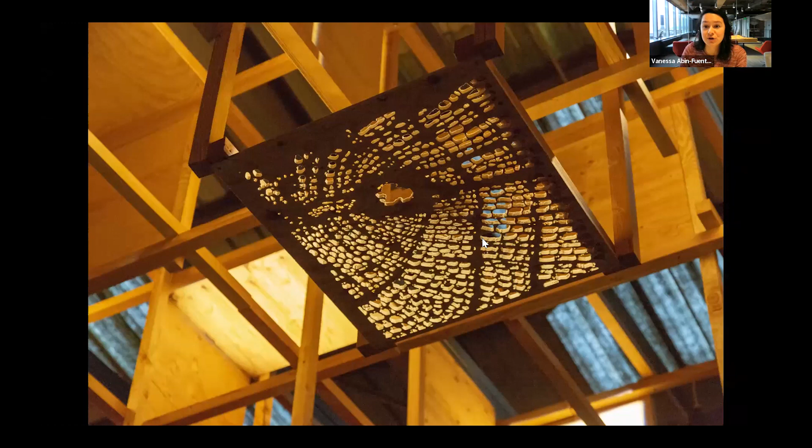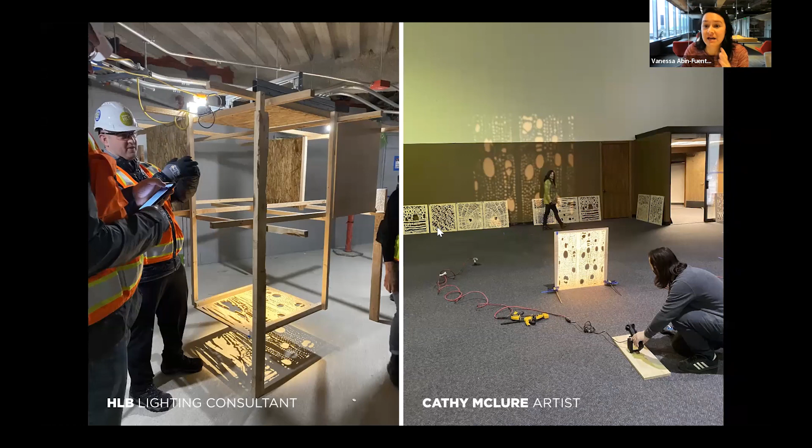It was actually so successful that the client hired us to fabricate the art panels for the final installation. This was one of the first things we did using the design lab we have down below, again reinforcing these meaningful partnerships with our consultants and artists that carry all the way through installation to the final form.

It's also a great example of many others where we prioritize collaboration and working with talented professionals to reach a shared outcome. All of these ideas are really at the core of how we design and practice here at LMN. Thank you.